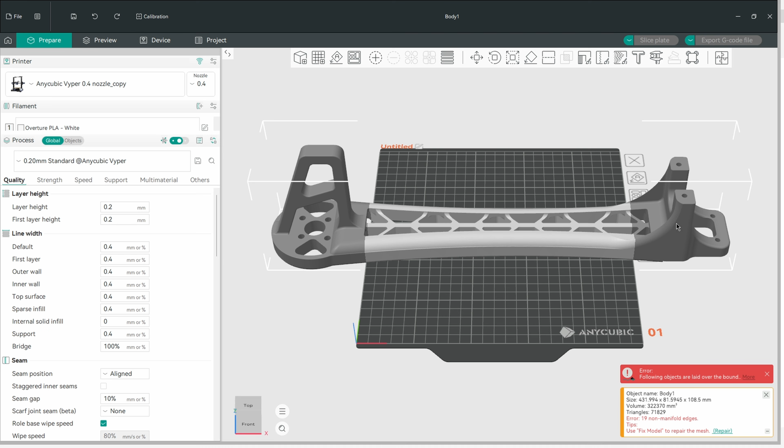Okay, so I'm going to click on my part right here. I'll say okay, and it's going to open up Orca Slicer. We can obviously see that the part will not fit on the bed, and it tells me 'following objects are laid over the boundary.' So unfortunately with the printer that I have, I can't print this part unless I were to break it down into smaller pieces. Now there's a couple different ways you can split this part.

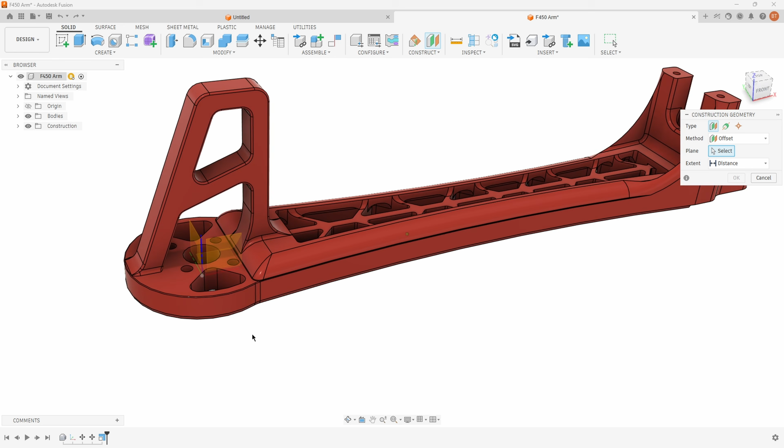The easiest way is to use a construction plane. So I'm going to just say Offset Plane, and we can see that this is positioned at the origin. I'm just going to pick this vertical plane right here, and then drag the arrow and kind of pick where I want to split this part, maybe just somewhere right around in here. Let's just say 200 millimeters. I'll say okay, and we can see we now have that plane right there.

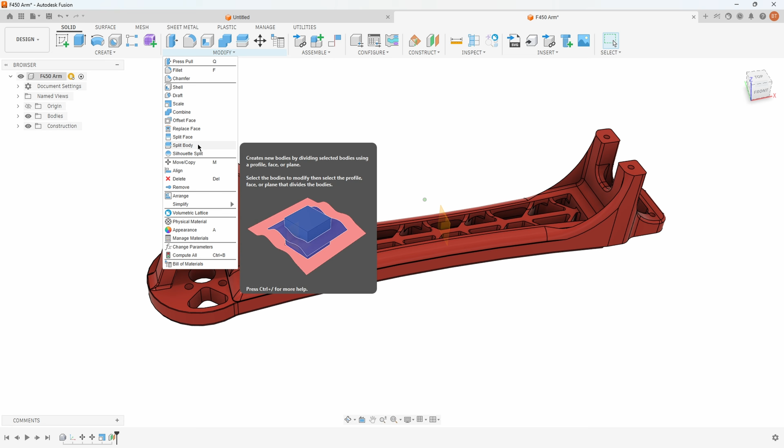And I'll say Split Body. Now, I don't want to say Split Face—that only splits a particular face. We want to split the whole body, so I'm going to say Split Body. What's the body to split? We'll click on this guy. What's the splitting tool? Then I can click on this plane and I'll say okay. And what it did is it split this into two separate bodies. You can kind of see how we now have two separate bodies.

Here's another tip that I use all the time when I'm printing. A lot of times people will right click on one of these and say Save As Mesh, and they'll either pick STL, 3MF, OBJ, etc. But you can only pick one part at a time—I can't select both of them.

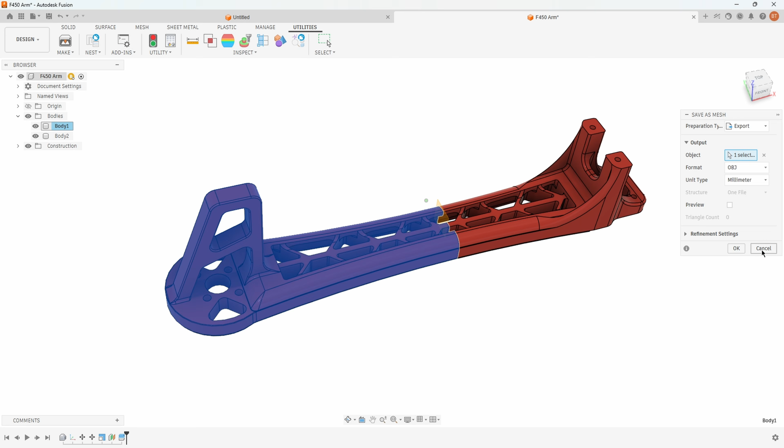I'm holding down my control key to try and select both of them, and it won't let me do that. So here's a better way of doing that. If you click on the 3D print make icon.

It's asking for the object, so I'm just going to click on the top level up here. I'll click on this F450 arm, and you'll notice it's selecting everything. I'm saving it out as a 3MF, and it's going to go out to Orca Slicer. I'll say okay.

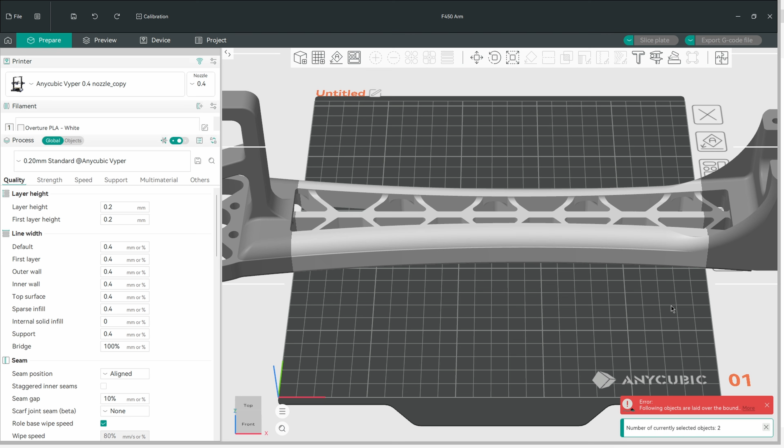Now we can see that it brought it into Orca Slicer. It looks the same, but if I click on objects, we can actually see that we have two objects, body 1 and body 2.

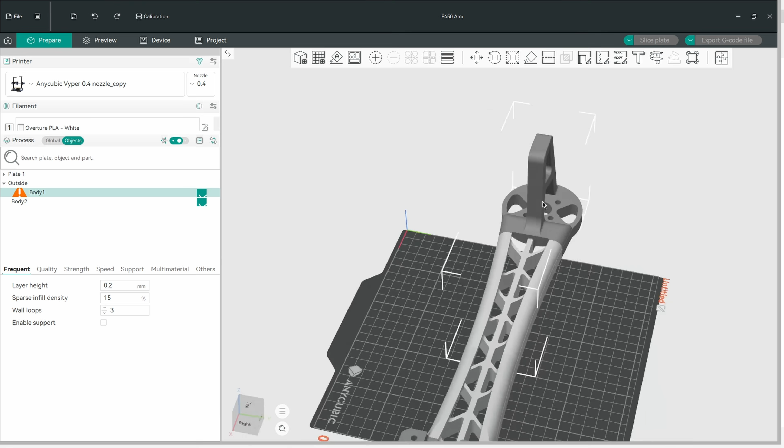It's basically warning me that they're over the boundaries. I'm going to go ahead and close these out. Oops, pan that across. I'll go ahead and just create another plate really quick and then just move this over onto the other plate.

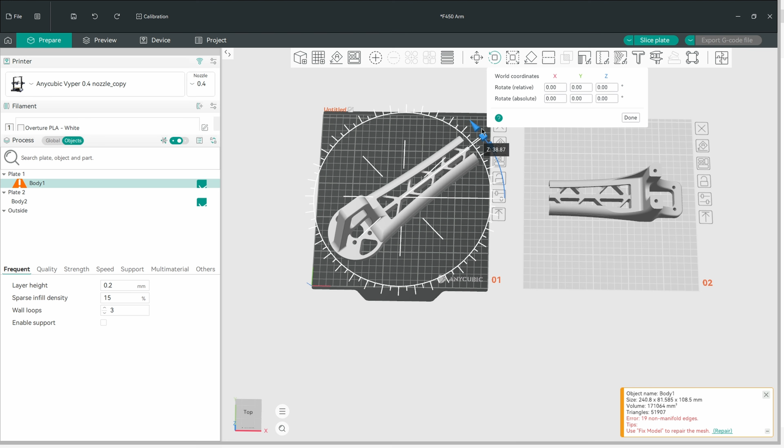We can now see, for example, that this would fit on that plate. I might even want to rotate this to fit diagonally, for example. Same thing with this guy here, I could make that match.

Now, with this said, this is a drone arm and I want it to be pretty strong. So I probably wouldn't split it straight across like we did here, because that would potentially break very easily. So I'm going to show a different method on how I would potentially split something like this and join it back together with a lot more surface area instead of just these little flat faces.

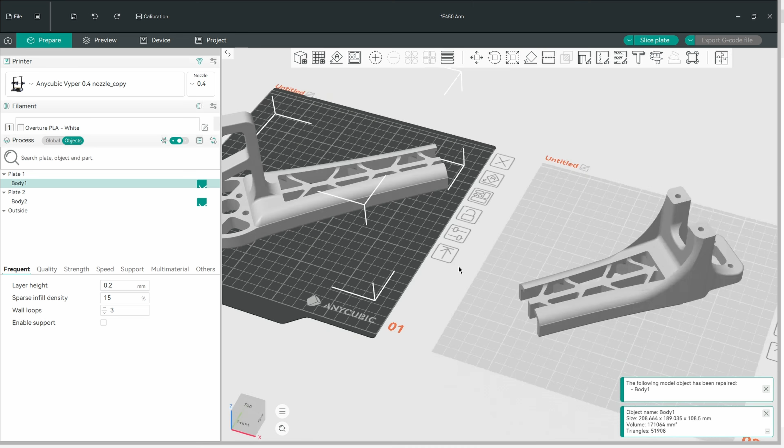Also, you'll notice this little warning right here. It's telling me it has non-manifold edges, so use fix model to repair the mesh. I'm going to go ahead and just say repair. Sometimes it doesn't know which faces are open or closed, and it automatically fixed that for me.

Okay, let's jump back into Fusion. I'm going to undo this split body.

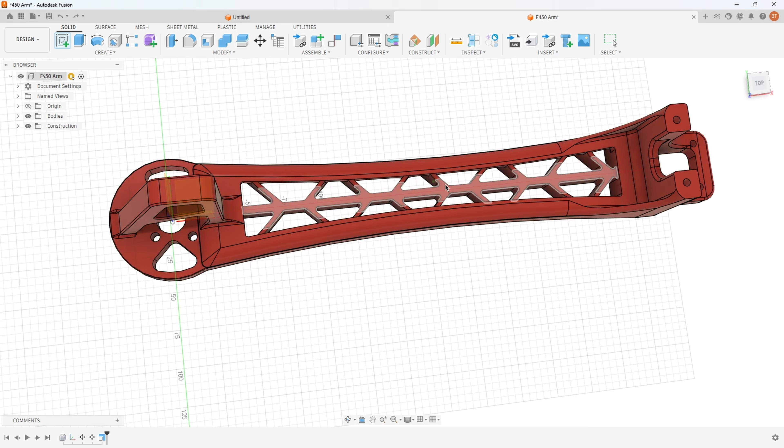The other method to split a body is to use a sketch. So I'm going to create a sketch on this face right here. I might want to break this into 3 smaller pieces. I'm going to start with a very simple sketch, and then we'll get to a more complicated one. So I might just do a center rectangle, picking somewhere kind of in the center here, and draw a rectangle like so.

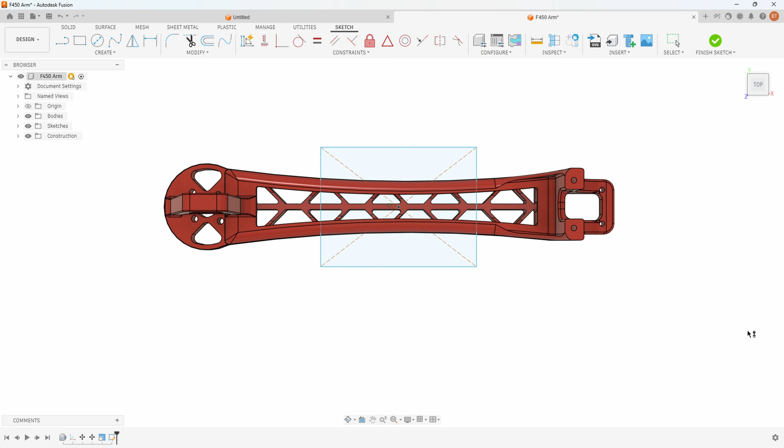I'll say split body, pick the body to split. What's my splitting tool? I'll go ahead and click on the rectangle sketch, and you can see how it's using that, and it's going to basically create planes to slice through the model. So I'll say okay, and we now have 3 separate pieces.

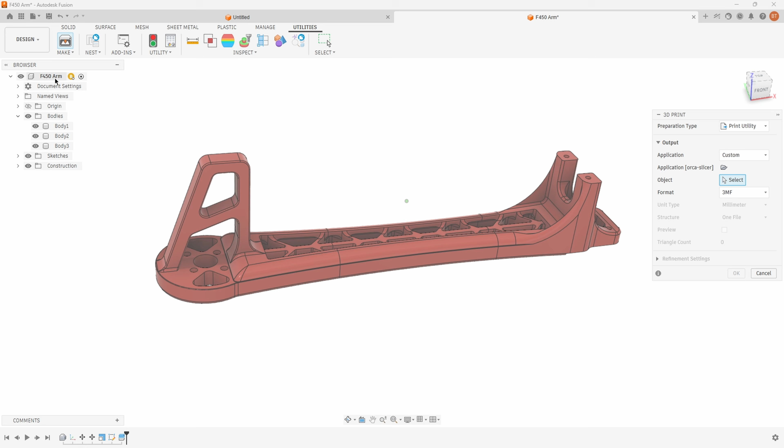Once again, if we were to send this to the print utility, it looks like it's still one solid piece, but if I click on objects, we can see we have 3 bodies. Once again, it's kind of complaining about non-manifold edges. I'll just hit repair, and it'll fix that for me. I'll also come in here and just say arrange all objects, and it can fit all 3 of those pieces onto my 3D printer plate.

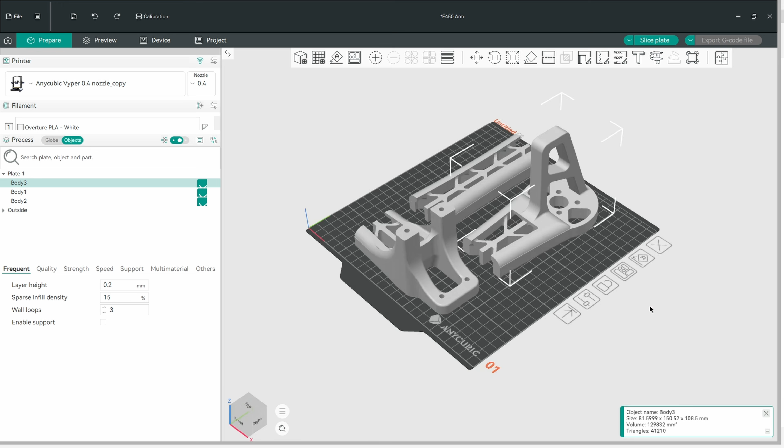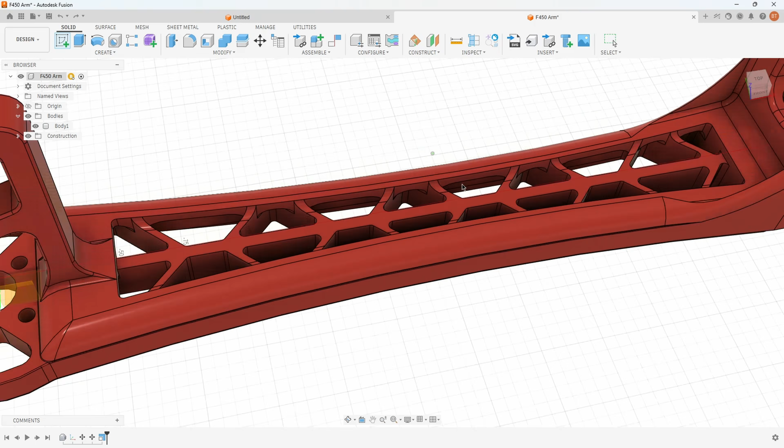Okay, the last method I want to show is also with a sketch, but with a more complicated sketch. So let me get back one more here. So here's our solid 3D model. I'll create a sketch, and I'll just click this flat face right here to place the sketch.

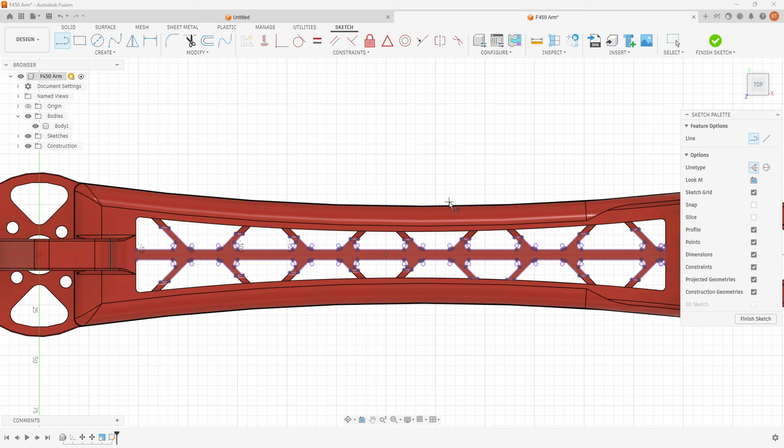I'm going to project the geometry, so I'll hit P for project, and I'll just click on this face right here. I want to grab some information from that face. Basically what I want to do is give the arm quite a bit of surface area to glue up, so I'm going to create some construction geometry. I want to draw a line kind of right down the middle here.

So I'm just going to randomly pick a couple points here like so, and I just created some construction geometry. If I get near the center of that, you'll see it's going to snap to the midpoint. So I can click on that one, come over here, and it's going to snap to the midpoint of that line. So I now have a center line going down the middle of this rib.

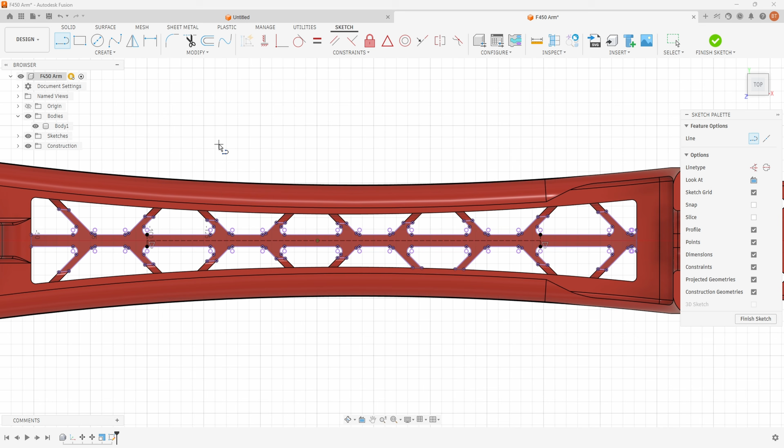Then I'll change my line type to regular line type, and I'm just going to draw a line down to this edge that's straight up and down, across, and straight up and down again like so. Now I want these to go right through the center of these rib sections.

So I'm going to use the horizontal vertical constraint. I'll zoom up here so you can see what's going on, and I'm going to click on this point. If I hover over this edge and hold down my shift key, you can see it's snapping to the midpoint of that line. If I don't hold down shift, you'll notice I don't see that icon. So what I'm saying is I want this point to be vertical, or in line with the middle of this line. I'll hold down shift, click that point, and you can see how that line moved over and is now lined up vertically with the center of that line.

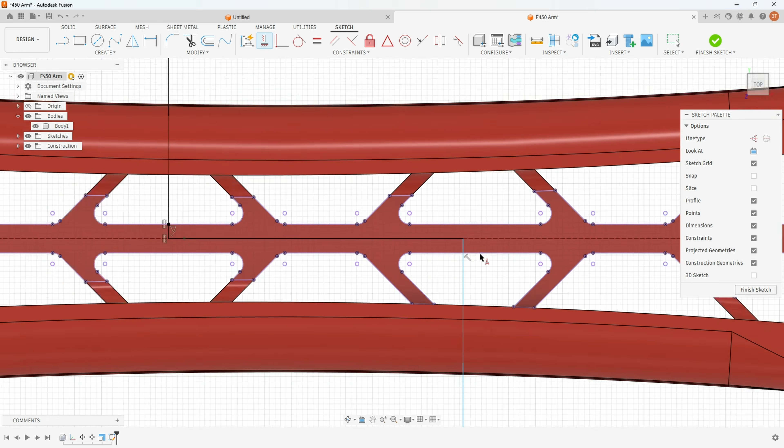I'll do the same thing over here. I'll click this point, hover over this edge, and we can see how it's snapping to that midpoint, and it's going to bring that line over and line up with the midpoint. We can see how those lines have now turned black.

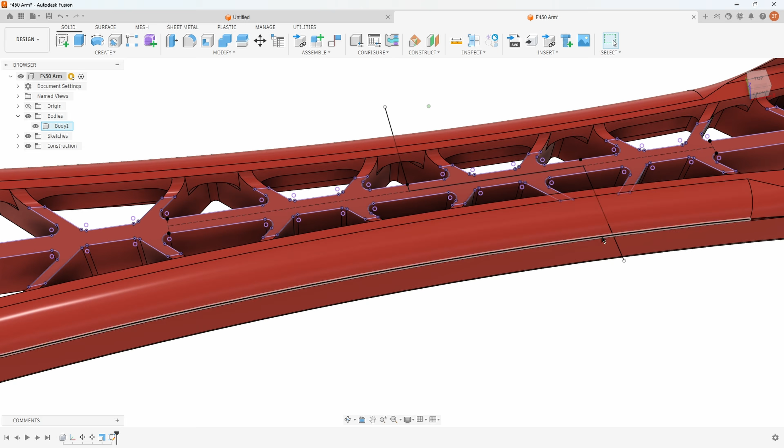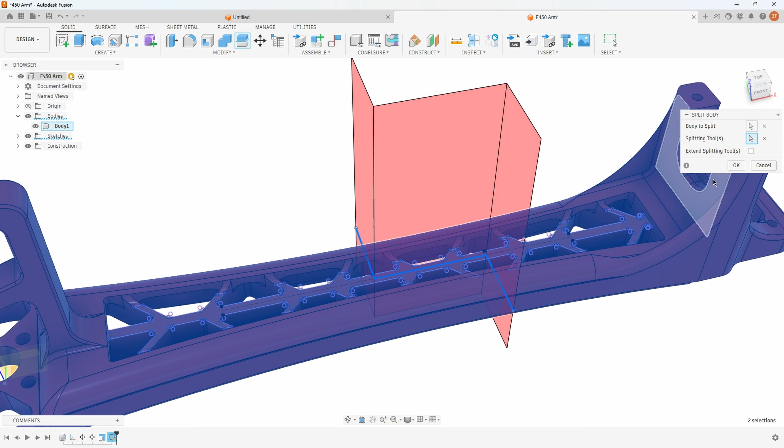So this is not a closed profile like the rectangle was, these are just some straight lines. I'll come in here and say split body. What's my splitting tool? You'll notice that when I get near this edge right here, it's going to select all three of those, and it's going to use that profile as my splitting tool. I'll say OK, and we can see we now have two separate bodies.

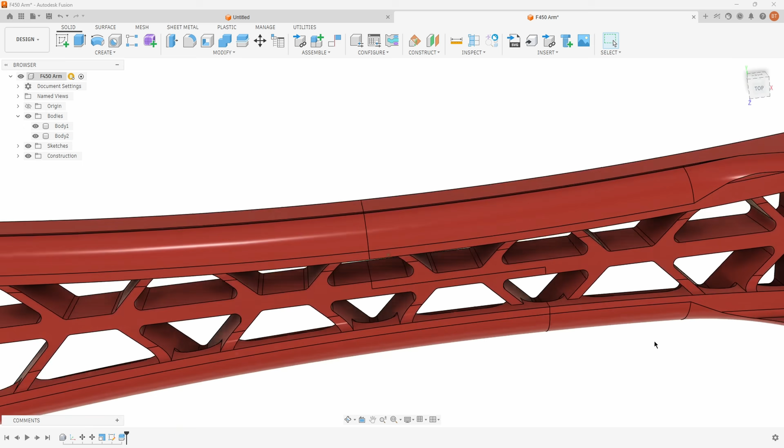Now we have a lot more surface area for the glue up. We can kind of see how we can glue here, here, all the way along here. We've got a corner, and we could even put some kind of screw, or even multiple screws, through here if we needed to strengthen this arm.

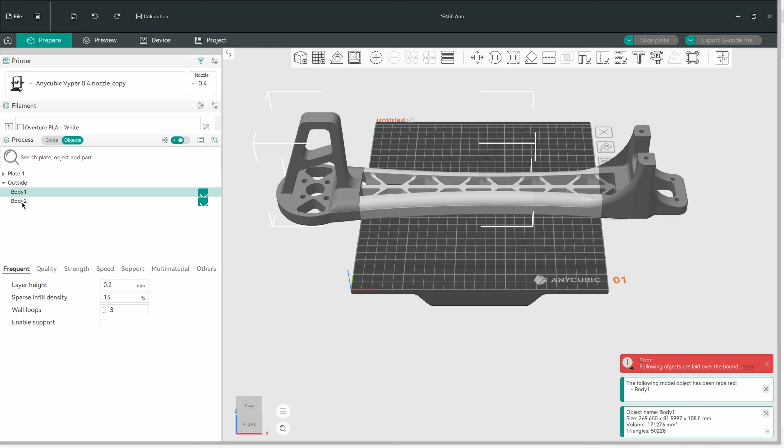So let's send this to the 3D printer. I'll make sure my format is 3MF, I'll say OK. Once again, we can take a look at the objects. I'm not sure why with Orca Slicer, whenever you use split body, it always thinks one of them is non-manifold. I think it might be this model itself with all the holes through it, but I'm just going to hit repair. It seems happy.

Now I'll try and arrange all of these objects, and you can see how it had to rotate this one to put it on one platter, and then it put this one on a secondary platter that I can print.

So that's a couple ways you can use the split body command to split a larger object into smaller objects inside of Fusion. You have control over where this split happens versus using the slicer or something like that, you wouldn't be able to do something like I did here very easily with a slicer. Just remember that you can use either planes or you can even use sketches.